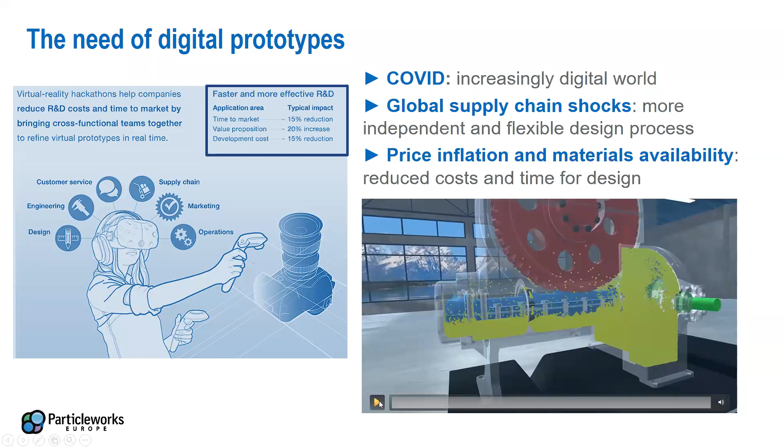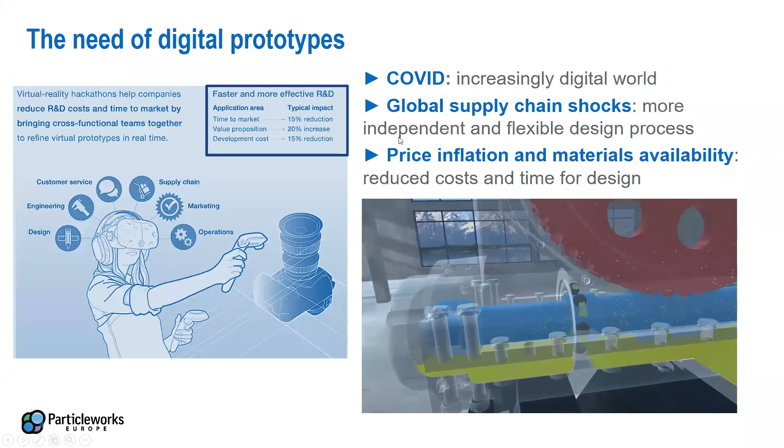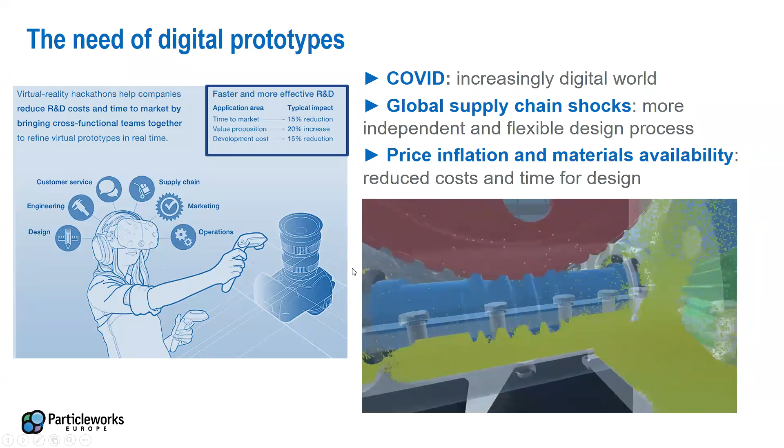Especially in R&D and testing. We know from a McKinsey report that implementing simulation early on in the design and engineering phase can speed up time to market and also reduce development cost, because we can have tests or R&D digitally everywhere without price increases. Actually, we can take advantage of decreasing hardware costs, like GPU cards. We will see how that can impact the simulation times.

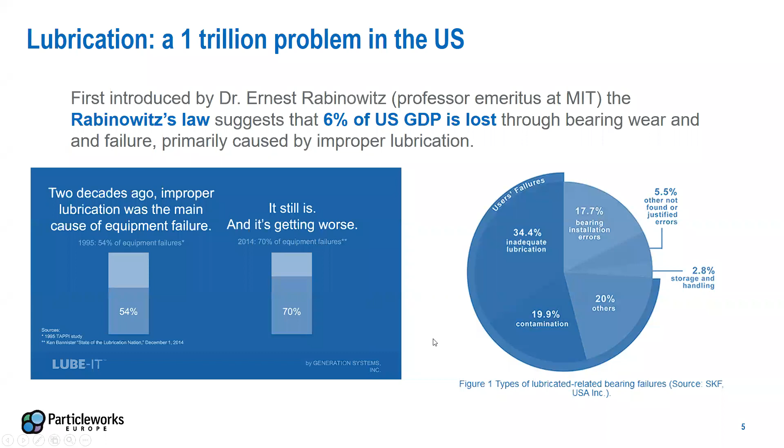Moreover, the cooling and lubrication aspects in bearings or gearboxes are an important topic, because as we can see here, there is a Rabinowitz law that suggests approximately 5-6% of GDP in the US is lost, for instance, for lubrication that is not sufficient to prevent failure in the equipment. So really, still 70% of equipment failures in 2014 was due to lubrication problems. So it's an important topic.

Let's see how Particleworks can allow for a fast R&D workflow. So the basic idea is presented here. Instead of using a clear casing type of setup in the testing or development of a gearbox, we can have a digital model integrating the fluid distribution, the splash, and the churning losses connected with the oil phase.

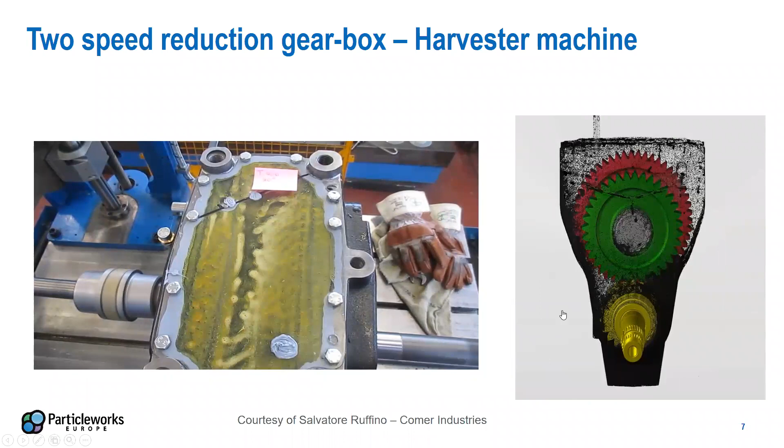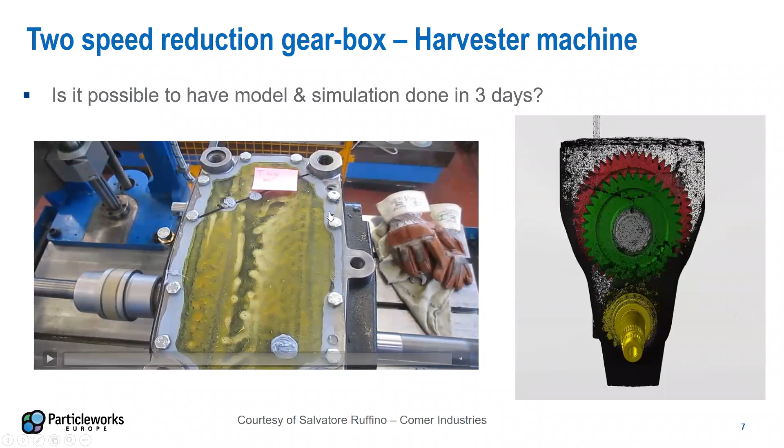This was one of the first customers in Italy, Comer Industries, and in 2016 they asked us: can you perform this kind of simulation from CAD to finish in less than 3 days? Back in those days, with traditional computational fluid dynamics, we couldn't achieve this kind of simulation times.

Traditional mesh-based CFD took weeks for preparing the geometry and also for computing the solution. Particleworks, with the moving particle simulation approach, really speeds up both the pre-processing and the CPU or GPU time.

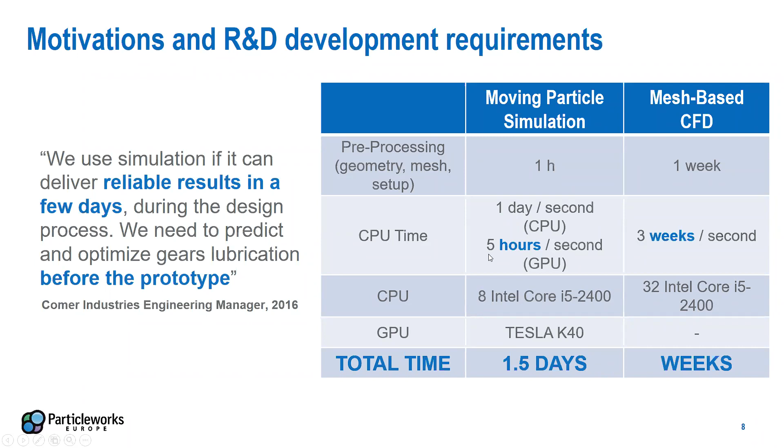Why is that? Why can we achieve such low simulation times? Well, because in this kind of system we have a lot of splashing, a lot of free surface flow. And the methodology on which Particleworks is based, the moving particle simulation, allows for a dynamic mesh instead of a static, pre-calculated Eulerian grid.

This means that the fluid is automatically initialized at the beginning of the simulation, and the dynamic mesh that results from the particle discretization moves with the simulation and adapts, localizing the computational nodes where needed.

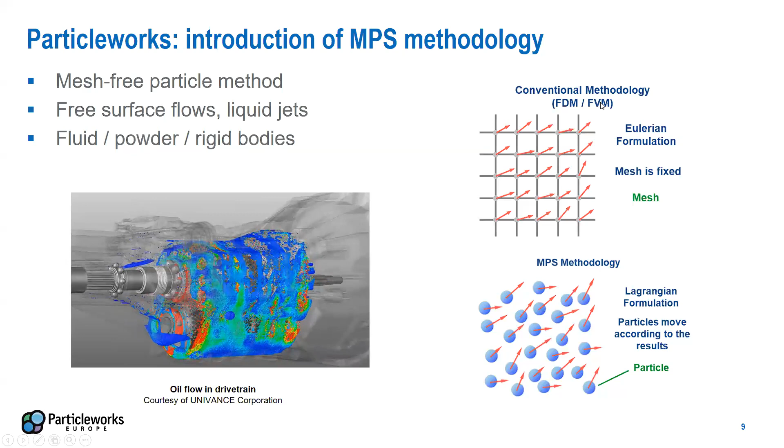We solve the Navier-Stokes equations, the traditional equations found in conventional fluid dynamics, but in a much more efficient way.

The fact that we don't have to generate the fluid mesh allows us to use the CAD as it is. So we don't have to clean the CAD, and the designer can quickly change the CAD and monitor the influence on the lubrication aspects.

The numerical settings are very easy to set up, so more engineers, not only CAE experts, can take on digitalization projects and access CFD solutions.

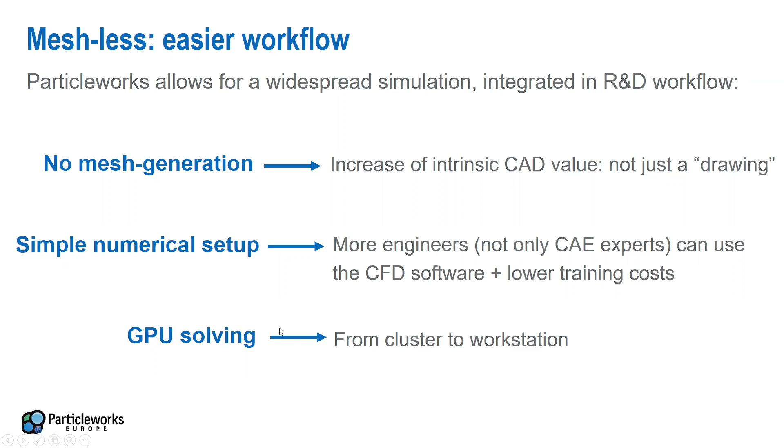The fact that we can run on graphic cards, like NVIDIA graphic cards, makes the hardware infrastructure much easier to implement. So we don't have to create a cluster, but we can run on single workstations, decreasing the startup costs.

Here is an example of the validation we carry out with Comer Industries. As you can see here, we have the digital model built with Particleworks, and on the right, we have the clear casing. Oil distributes very similarly between the digital and the actual prototype. You can see that on top here, there is a lack of oil, so the bearings are in a critical condition in this kind of configuration, given the RPM condition and the oil level.

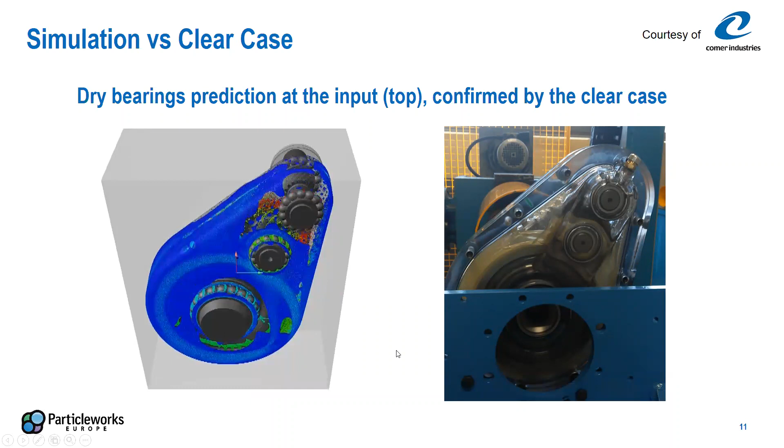So indeed, in this work, we demonstrated that for several RPM conditions and rotational directions, we could predict and match what was observed experimentally in terms of good or bad lubrication levels. So this is the validation. A technician looks at the results provided by the clear case and compares the simulation results as well. Of course, this can allow this kind of analysis before implementing a real prototype.

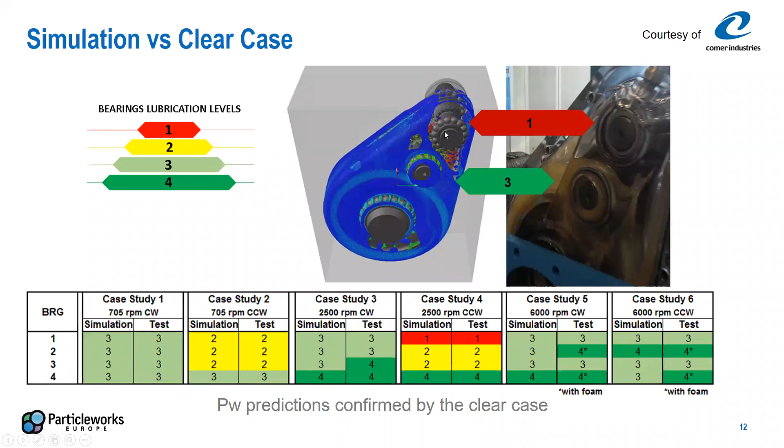So this can take months to build. And if you want to inspect something inside the clear case, it's very difficult, while digital models really can allow for much more in-depth analysis.

So it's not only lubrication what we can analyze with Particleworks, but also temperature prediction. So we have different approaches. The first one is a flow-only type of indication that we can achieve with Nusselt correlation. So basically, from the oil physical properties, we can estimate forced convection at the walls and have information about HTC, the heat transfer coefficient on the wall. Usually with this approach, we then transfer the map to an FEA solver for temperature distribution in the solid.

The second step is to actually activate fluid temperature variation inside Particleworks. In this way, we can compute thermal equations, so not only forced convection due to the velocity of the fluid, but also some thermal equations are enabled. And in this way, we can estimate heat fluxes, and we can also check the variation of the temperature inside the fluid phase and implement temperature-dependent fluid properties. So like we could analyze viscosity changing with temperature or other properties of the fluid.

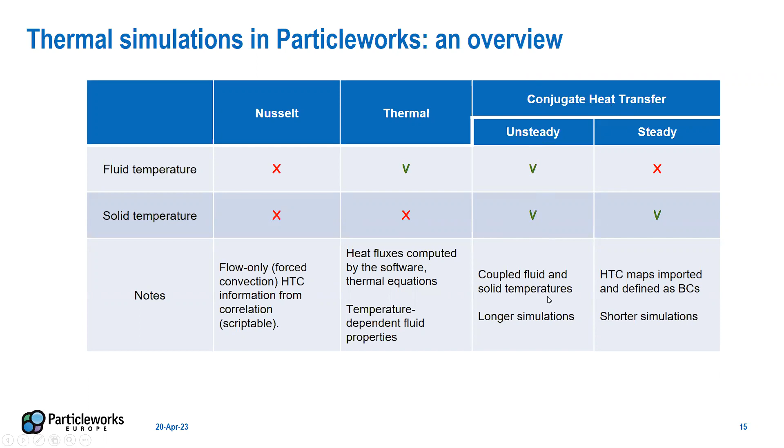Moreover, we can also activate the solid analysis inside Particleworks, so still inside the same interface. The idea is that in this way we have a finite element method for the solid part. So as we will see in the next slide, we can do effectively conjugated transfer and check the thermal coupling between the fluid and the solid temperature. This usually results in longer simulation, but in a very detailed analysis.

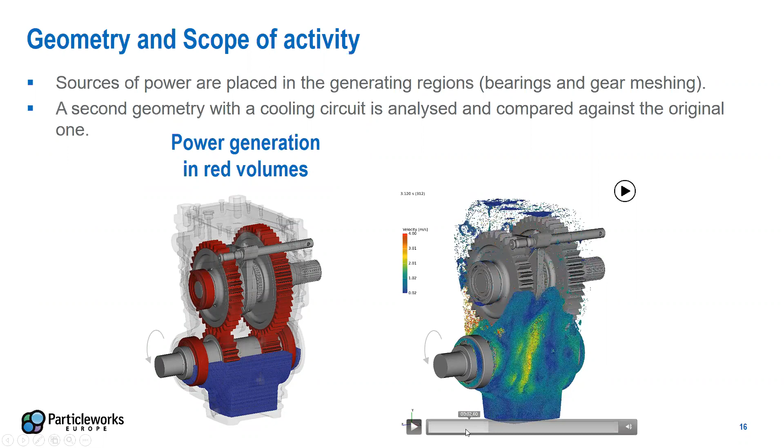Here is an example of a conjugated transfer simulation. In red, we have power losses, thermal losses due to shear that were estimated by our customer. So from other software or from standard values, we can apply localized losses. And as you can see here on the right, we can then simulate not only the fluid, but also the temperature.

So this is the temperature of the oil phase. As you can see, there is a clear variation between different areas. There is some oil trapped in the bearings area that heats up. There are some more hot areas at the bottom again. And here we have also the solid part in which we can clearly see the areas where losses are greater due to the bearings interaction with the walls and the power losses that we applied, as shown in the previous slide.

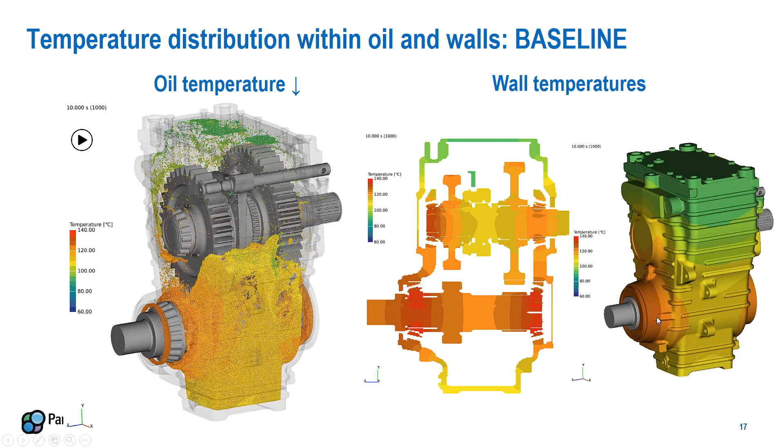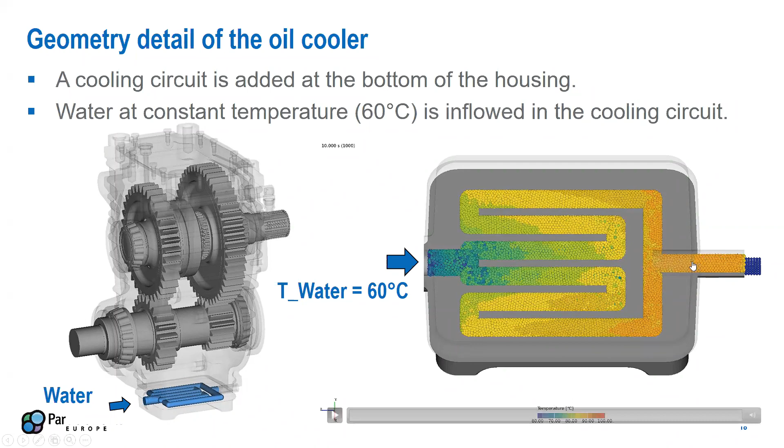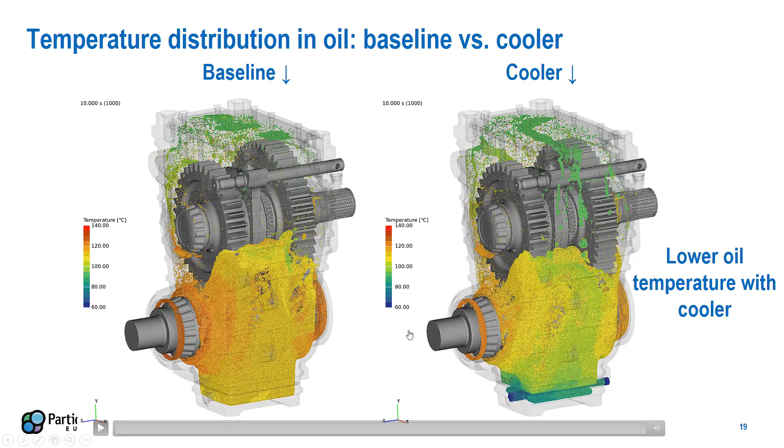On the right, we can also map the temperature distribution on the housing. And it was interesting here because we could model still in Particleworks a water serpentine integrated in the housing. As you can see, also water heats up due to the interaction with the housing. It's injected at 60 degrees, but it goes up to approximately 90. And we can clearly see the effect of the cooling serpentine at the bottom, resulting also in oil temperature that are lower, and in general also solid and housing temperatures that are lower. So really a very interesting example of coupling solid and multi-phase type of analysis in just one digital model with a transient development of all these aspects.

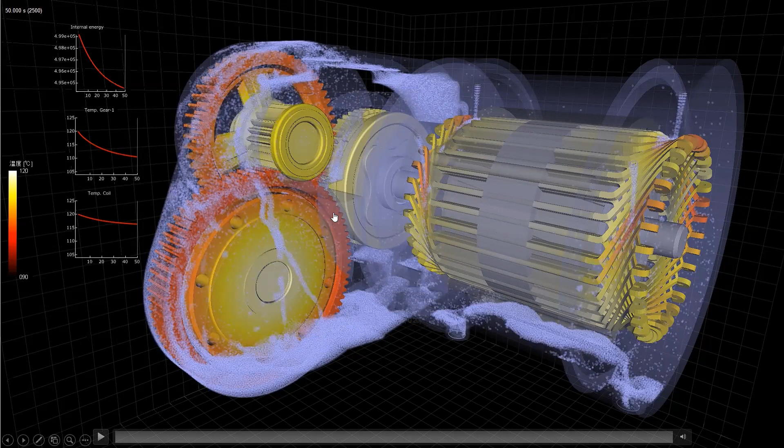So the colors are maybe a little bit misleading, but we can clearly see the transient evolution and then reaching a certain plateau of the temperature, both in the e-motor and on the gears. So, a very comprehensive type of analysis that could allow us to study, for instance, on the e-motor side and on the jets, the influence of flow rate or viscosity of oil on the HTC.

So we can clearly see that increasing flow rate on the jet side results in better cooling on the windings. And also the viscosity of oil can have an impact, and we can see that actually the HTC is lower when we increase the viscosity of oil.

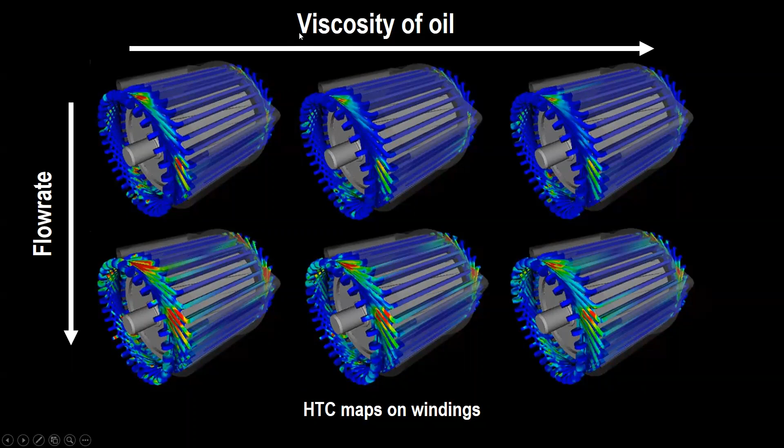The same can be visualized in the average temperature of the coils for the different configurations I showed you. Increasing the flow rate will result in lower average temperature on the coil side, while increasing the viscosity of oil will also increase the coil temperature.

Air can be simulated in different ways in Particleworks, as Particleworks integrates a finite volume solver consisting of a Cartesian grid that is created automatically by the software inside the same simulation. And this allows us a coupled simulation between the fluid MPS phase and the air finite volume algorithm.

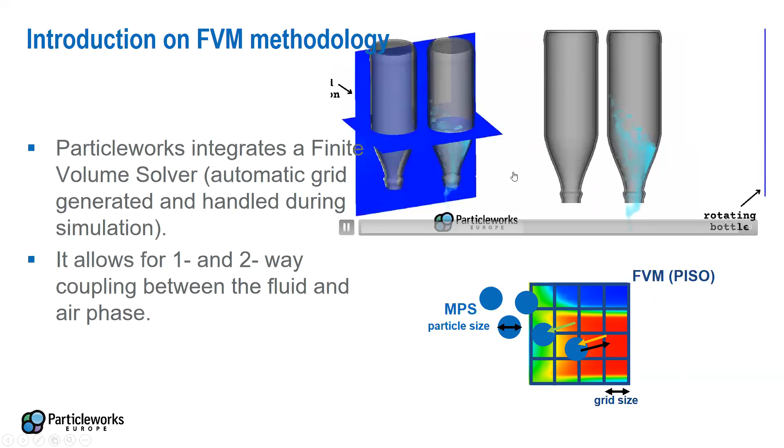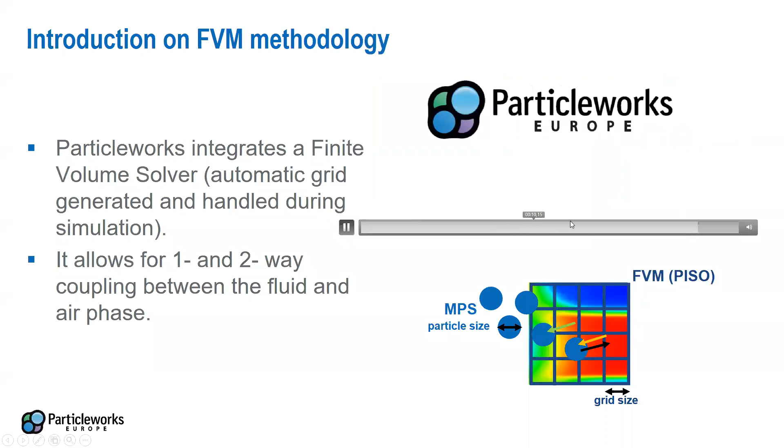We see here an example of emptying a bottle. In one case, we have a rotating bottle, in the other one, a static bottle. And we can clearly see the coupling between the air component and the fluid component, resulting in a much faster emptying process for the rotating one due to the inner vortex creation seen in this snapshot.

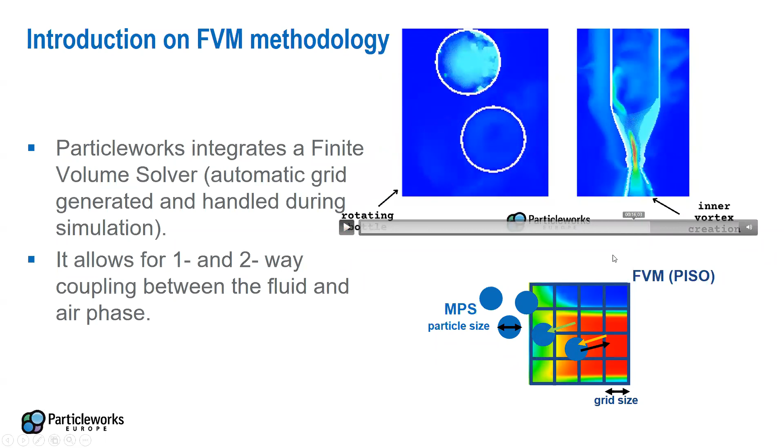Of course, we can apply this also in gearboxes to account for different types of drag due to oil and air interaction. On the left, we have the oil distribution when we activate the coupling between the fluid phase and the air phase. On the right here, we see only the air phase, which is present where oil is not, usually, of course. And we can see some splashing inside the air phase.

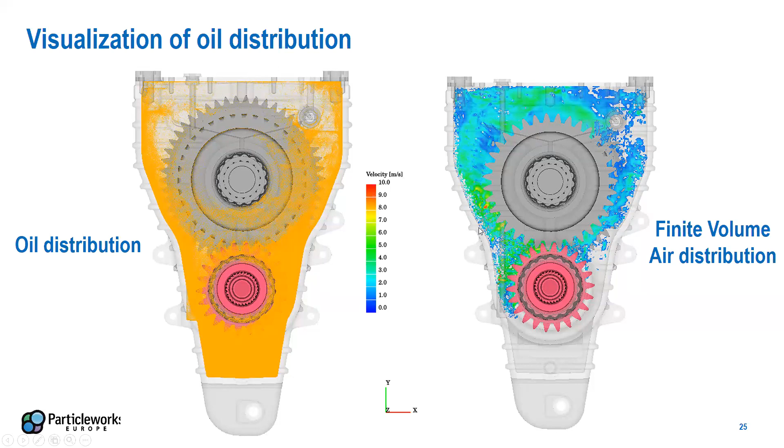And in general, we can also have a look at the velocity profile for the air phase together with the oil. Here is a comparison, just an example. I don't want to suggest that it's always like this, different, with the inclusion or exclusion of air, but we can clearly see that splashing can be better captured when we also integrate the drag effect of air.

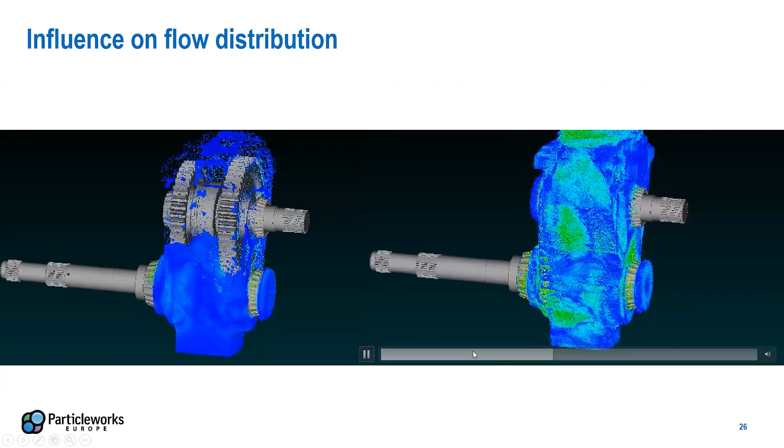This is usually suggested when the velocities are significant, and it's an additional numerical aspect that could be integrated when some experimental results want to be better matched.

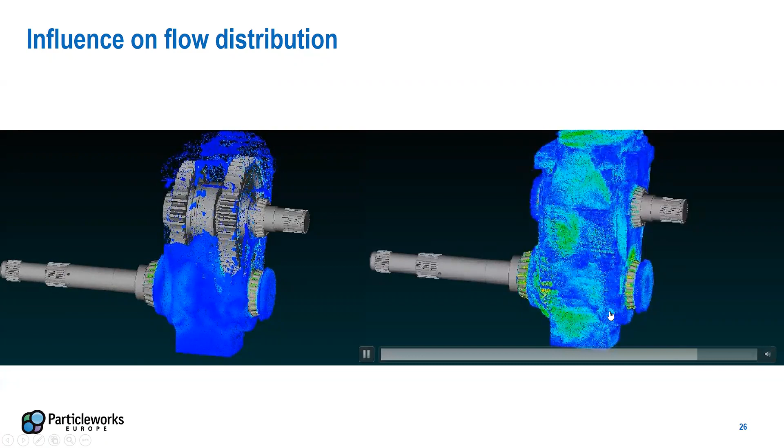Air was simulated with a finite volume method in the previous example. In this one, we can have a different type of air simulation. In this case, we focus on the bubble generation inside the fluid phase. This could be due to some interaction between the fluid and the solids, or due to some breakage of the fluid surface.

So with this method, we actually take advantage of the coupling between Particleworks and Granuleworks, DEM solvers, so we will also see it for powders. The idea is that the solver will understand when some aeration will occur in the fluid phase, and will generate and track the development of this multi-resolution particle for the bubble size.

Okay, so we can see that bubbles here form due to the breakage of the fluid in that section, and they also have a growing law due to the interaction between them. And in this case, it was interesting because we could monitor if air was reaching a critical area, that is, a pump area.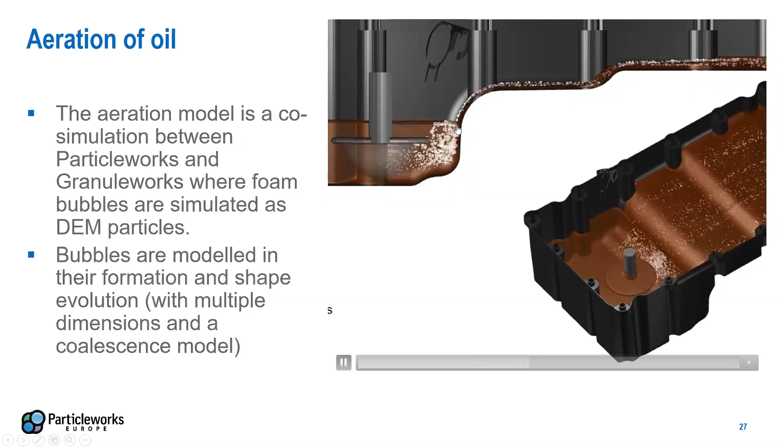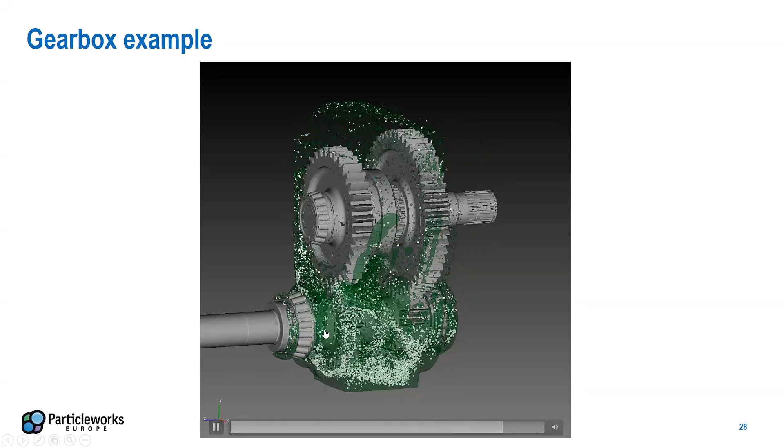Here is another example in a gearbox type of application. And we can see that, due to the breakage of the fluid and the rotations there, we have bubbles generated mainly in the area at the bottom, or due to the interaction with the walls.

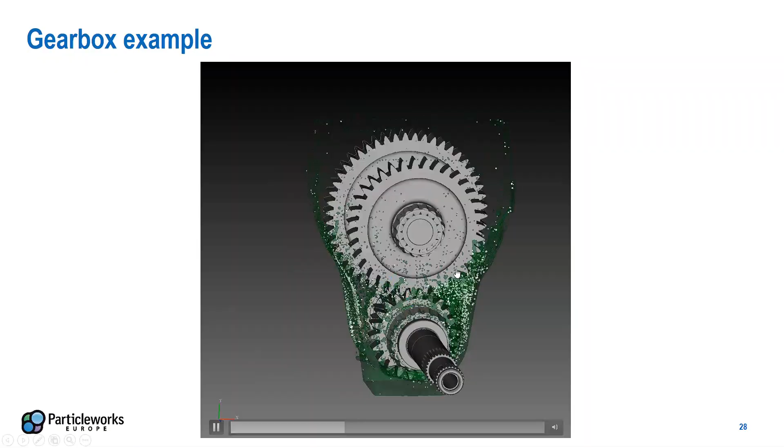Another interesting feature integrated in Particleworks is the possibility to automate every aspect of the simulation with Python. We have a specifically developed Python module called pwpy, developed by the software house behind Particleworks.

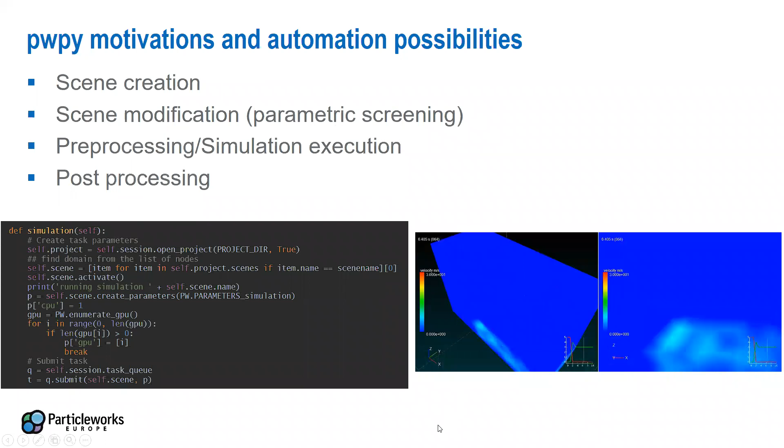In this way, we can easily modify the project. We can easily create a Particleworks project from zero, and we can run pre and post processing in a very automatic way. We can also do screening of numerical or material parameters in a very effective way.

For example, here we demonstrated the possibility to automate different types of boundary conditions on the rotational speeds of the input shaft. From this script that we built, without even opening the Particleworks interface, we were able to generate what you see on the right, setting the transparency, the colors, and the numerical settings.

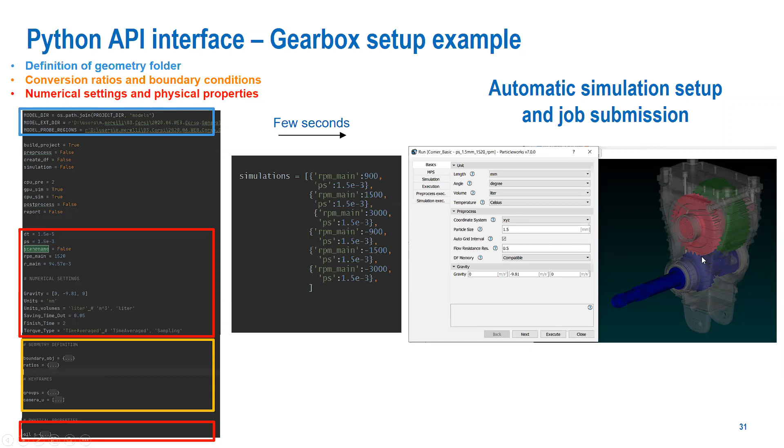We also set them dynamically, changing the RPM conditions using a dictionary and set of different simulations. It's a very nice way to automate aspects of the simulation once we are confident with the basic simulation and the results. Interesting stuff also there.

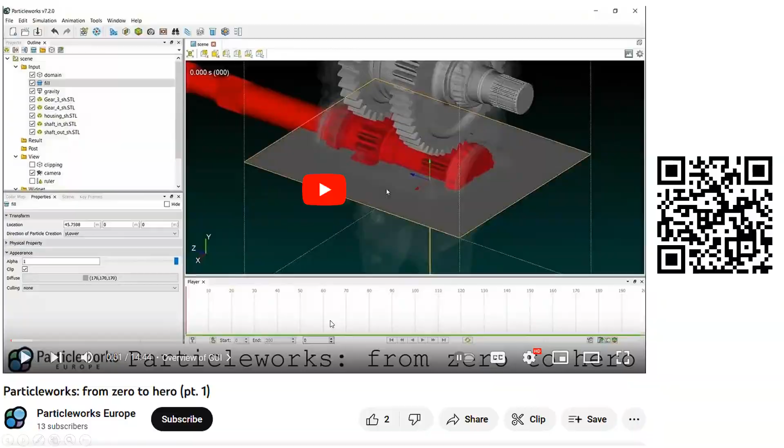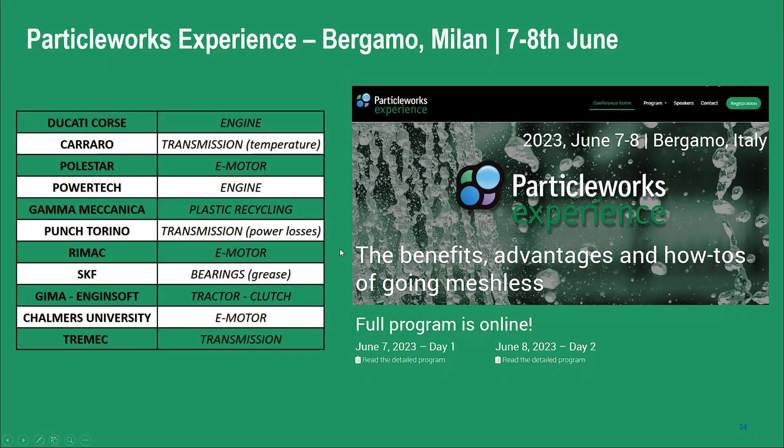Regarding already available material, we have many examples you can check out on the website Particleworks Europe. Here's a little bit of a list.

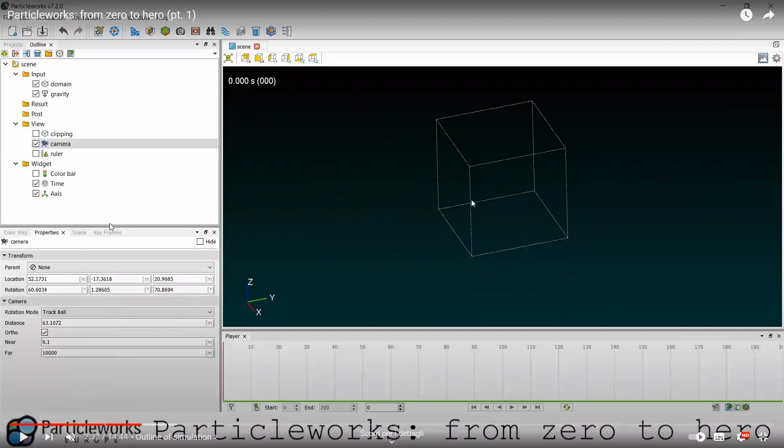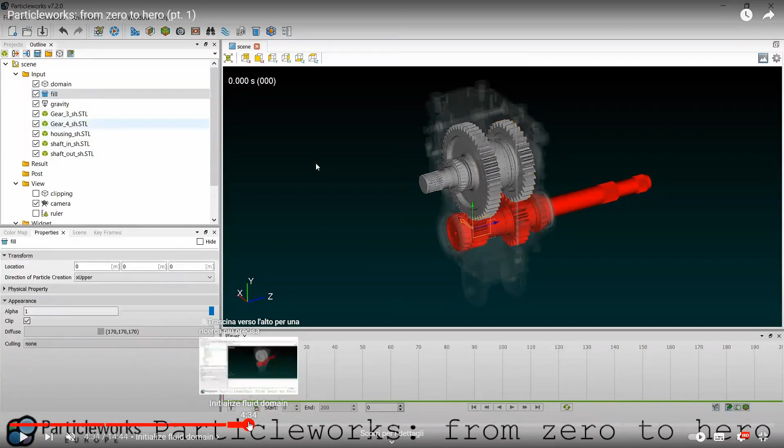You can import the geometry very easily, and those were the STL files imported in Particleworks. Then by setting up a filling plane, we can initialize the fluid domain below a certain level. Then there are some physical properties definitions. I won't show you all the details, but you can easily check the steps in the video.

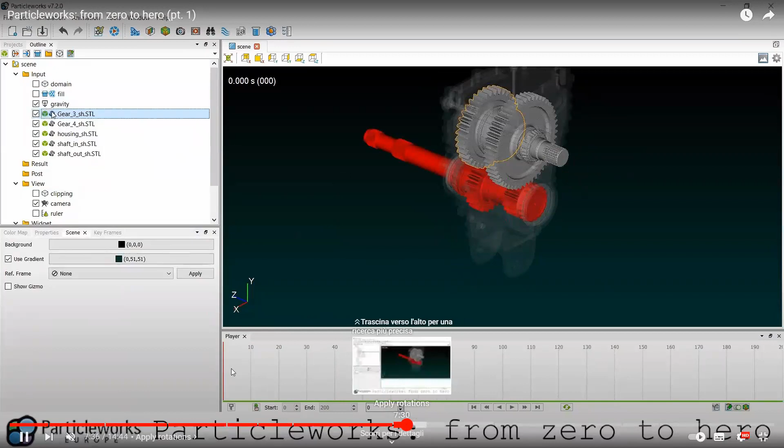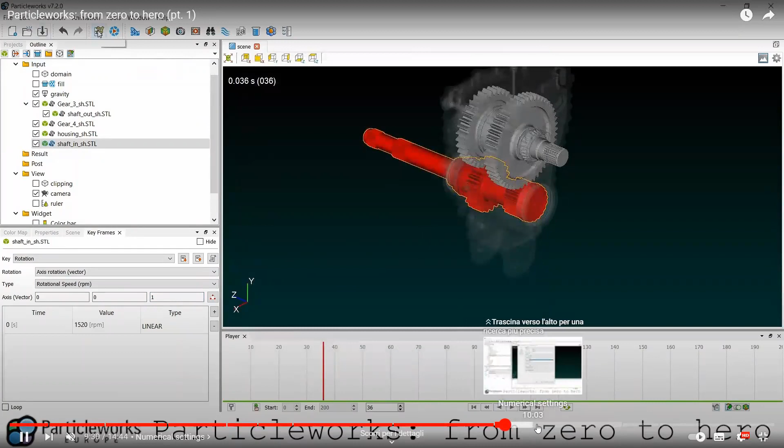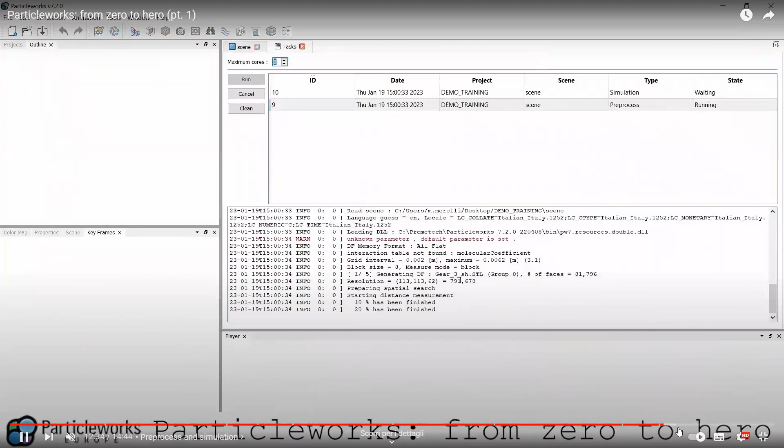You'll see how fast it is to apply rotations to elements with keyframes here, so a really fast setup. And then we have the numerical settings with a certain particle size and so on. In 15 minutes we were able to generate the first simulation and achieve an indication of the lubrication.

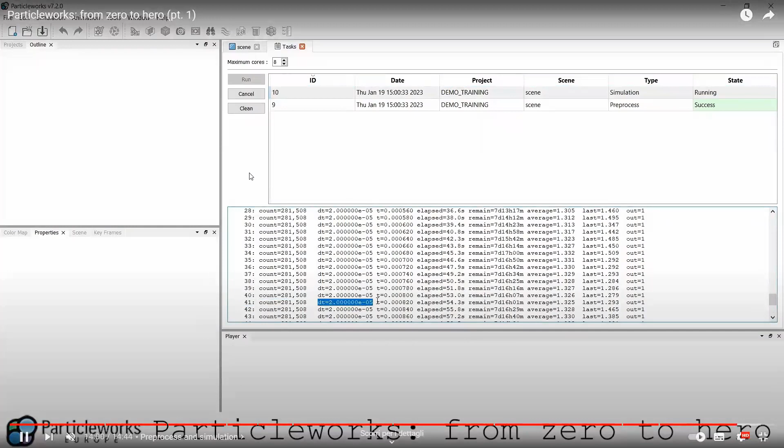In the same YouTube channel, you'll also see some post-processing, just to give you an idea of the capabilities and how the Particleworks interface looks. But if you want to hear more, my suggestion is to go to the Particleworks Europe events website and check out the next tech day.